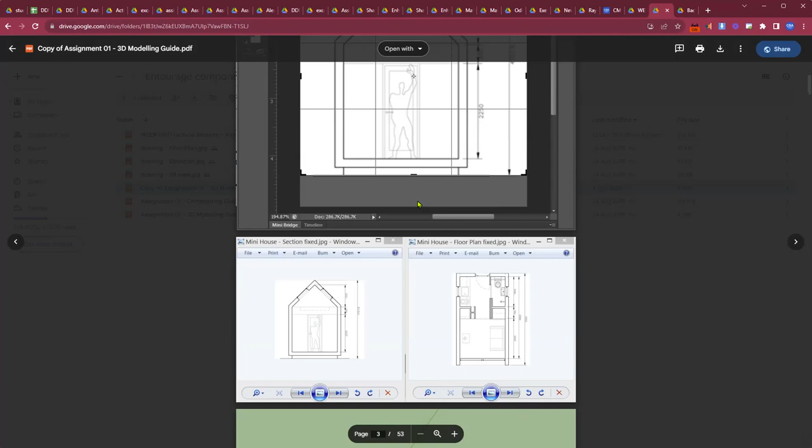And here we go, 3D modeling guide, right? So the video that we did only covered just the part to get you started. So on the handout where it gives you a link and says this is where you find the plans to do the model, in that folder I have placed a PDF, which is here. This PDF is what I call the cheat sheet, so it gives you a step-by-step snapshot of ways how you could go about building it.

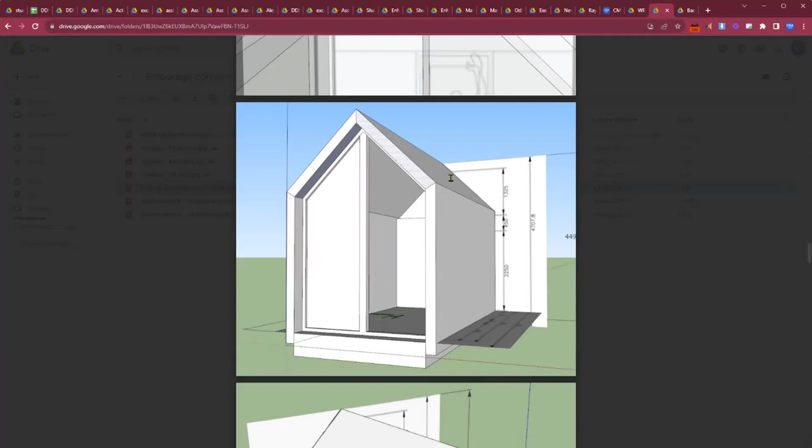All right. But nevertheless, for today's class, wherever you are with the model, we're just going to be using it as is. So let me see now, is there anybody here who finished the model? Anybody reach 70%, above 70%? No? No? 50%?

Hold on, who started? Who started the model? Who here started the model? Oh, wow. All right, so you should have told me about this sheet. I would have finished it then. Well, I did discuss it in the last class. All right, so here what now?

I will upload today's video. But you can take it as a danger warning that if you have not completed the model by today, then you're basically in the red for handing in the assignment on time, because this is the final week for handing in that assignment. So we said 2 weeks, and 1 week is gone already. Today is Saturday, so the official due date of this assignment is going to be by next class, right?

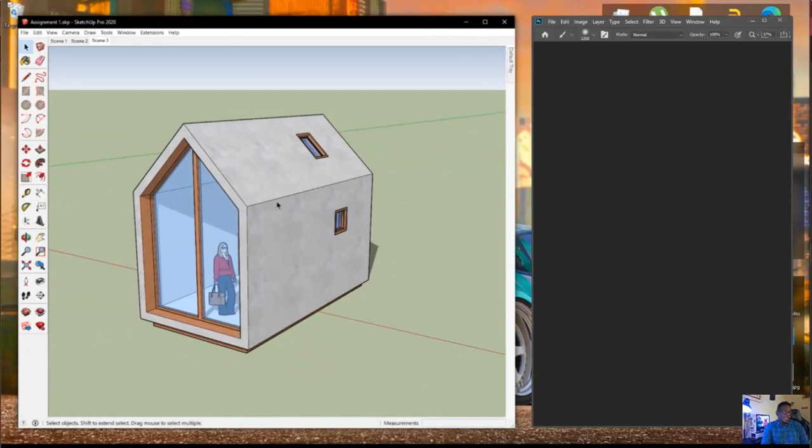Ideally, the first thing we would want to do is ensure that we have everything correct on the model, and let's take a look at that reference image again. So this is our model here, let's take a look at that reference image. You can see on the reference image that we have a nice background, we have this building in the water, but more importantly, it is perspectively accurate. We also have an entourage here, so in this case it's a boat. So the first thing we need to do is get our building at the correct angle.

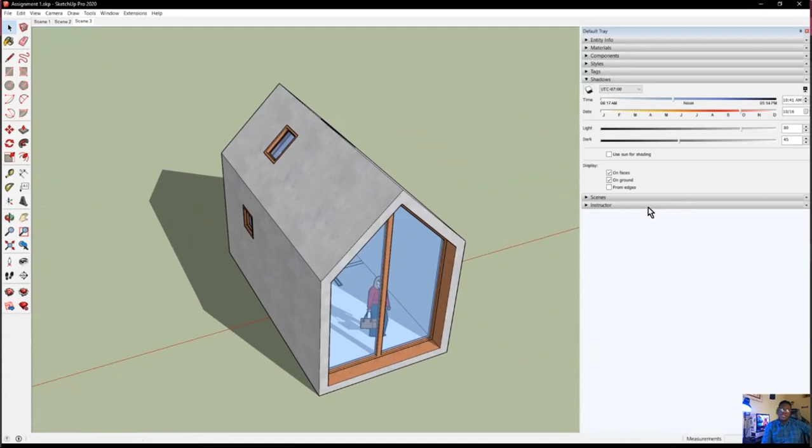Now, to do this, we're going to use a couple features from our tray, so I'm going to pin that since we'll be using it quite a bit. Now we do want to ensure that we have our shadows enabled, and we also want to get our background as well. If you look on the handout, you'll notice there's actually a link here to access entourage and backgrounds and things like that. Let's click on that.

Now, ideally, you must use a background from this folder, right? You cannot use your own background. So we're going to use this background and we're going to actually put this building in the water. Let's just look at the others that we have here. Okay.

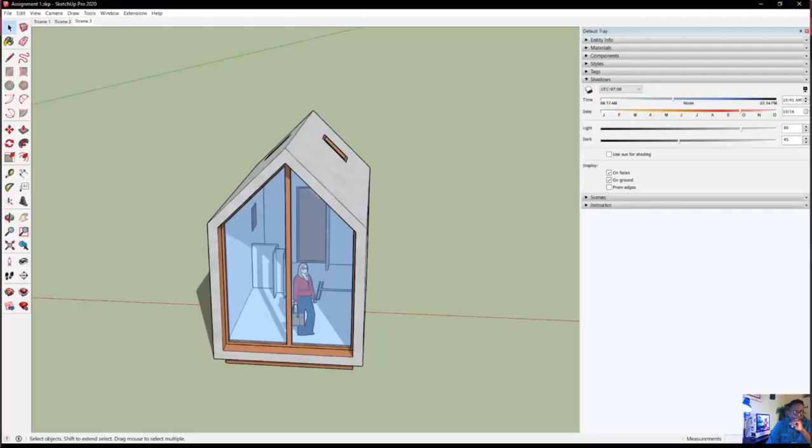Now the next thing that we want to do is, let's go back to SketchUp, and the first thing we need to do is to align our building to the background. Now how you do that is you need to head over to styles, and then you're going to go to edit, then head over to background and watermark, and you're going to click the plus to add a new watermark.

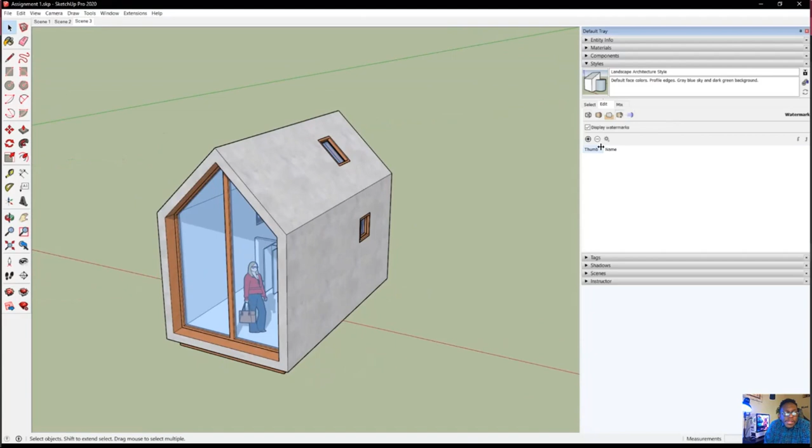Now you're going to look for where you downloaded the image, so here it is, and that watermark should just pop in our scene, and it should be semi-transparent, right? So notice it says you can do an overlay or a background. That's a background, so let's leave it on background and choose next.

And we're gonna just leave this as is. Choose finish, stretch to fit screen. You're going to lock aspect ratio, ensure that you do that, and you're going to choose finish.

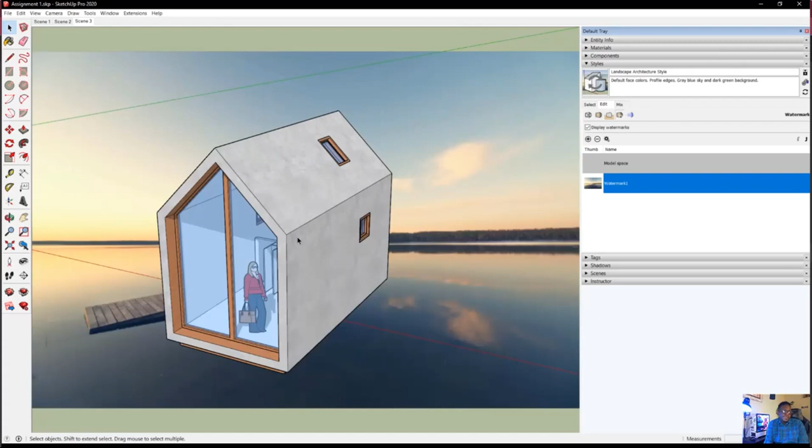So now what you're going to do is angle your building so that it lines up with the image, and you're going to do that by panning and zooming and just kind of getting the image just right. Now you also have to watch your perspective, because this image has, you know, the perspective is a little bit wider, I think.

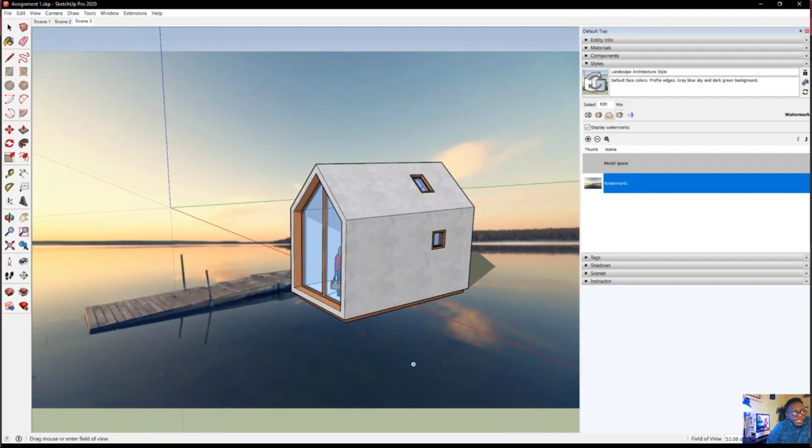So I would go to view and camera, and go to field of view, and I'm able to just kind of change my perspective a little bit to better match the image here. Kind of push it up a little bit, and you can kind of see how your lines are aligned to the image. You can use that to help determine how it would be.

Now you can additionally decide to put your building on the opposite side here. Let's kind of orient that a little bit. Now once you have your building roughly in place, you are gonna create a camera.

Let's give another image a swing here, because some of you might choose another image that is a bit more challenging to align. This one is not so bad. Yes, let's look at this one here. So I'm going to download this image again, right? And I'm going to go back to SketchUp.

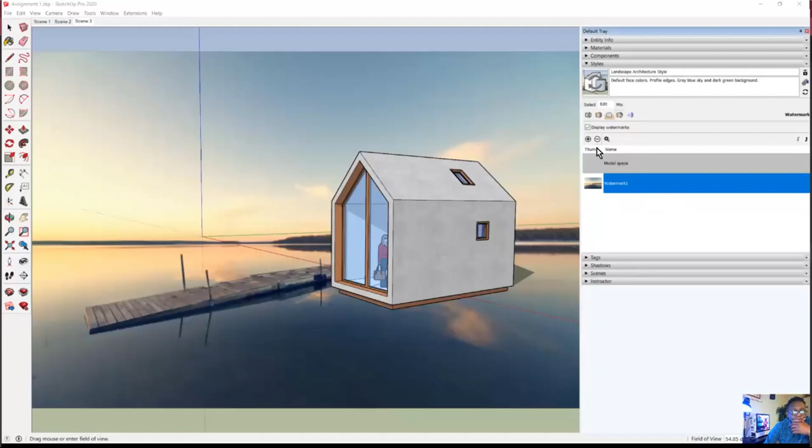And this time I'm going to choose a little minus there, so I'm going to delete that background. I'm going to go to add, and I'm going to add this new background, and I'm going to do the same things that I did just now, where I'm going to go next and next and next, and there we go. Oops, actually I put it on blend.

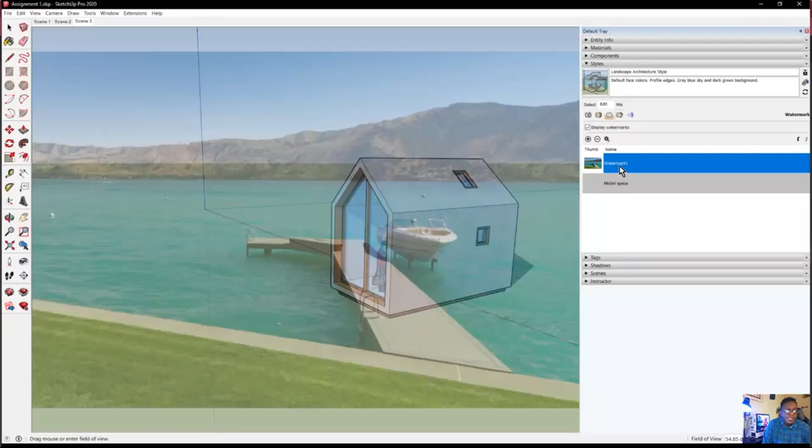Let's edit that. I think we can edit that. Okay, let's remove it again and add it back. There we go. Yeah, we want to change this to background, right, so that it's in our background.

There we go. So in this case, this one is a little more tricky to align. So remember, I was saying to watch your perspective lines. So if I do this like this, you would see that, okay, this is kind of okay.

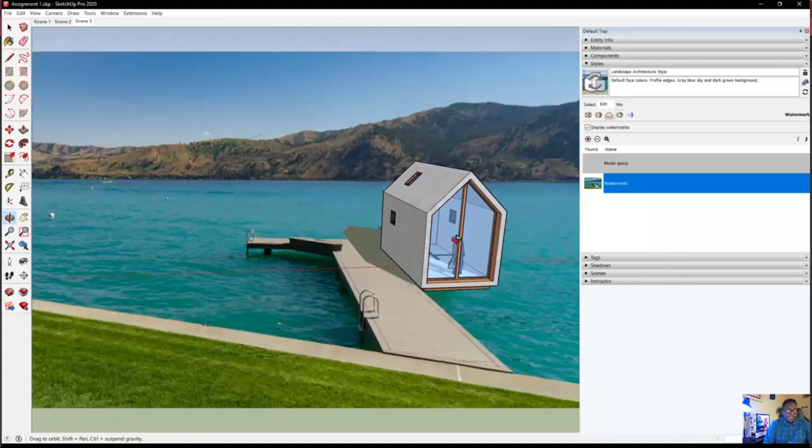It perhaps wants to come a little bit more that way. Then it perhaps wants to get a little bigger. So we're gonna zoom in a bit.

Now, when you're doing this, remember that this is a flat image. So let's assume that we wanted to put the boathouse on this side beside the boat, right? So we want to do something like this.

You know, let's say we want to do something like that. Well, of course, we're not able to put the house behind the boat because the boat is actually part of the image. So what we have to do is imagine what it would look like behind the boat, and then do that manipulation when we go in SketchUp.

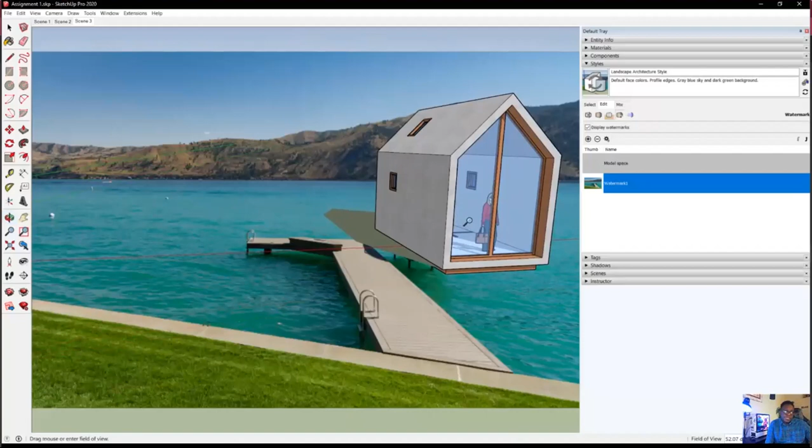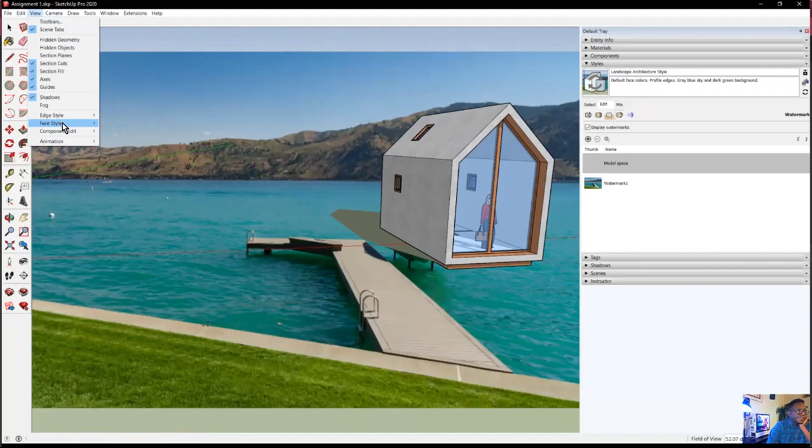So maybe it would need to be a little smaller, not too small. You can also switch your view to X-ray. Not X-ray necessarily, but more, let's go to wireframe. There we go. So wireframe will give you a better idea, because you can see where the lines are lining up.

So let's assume that we wanted to put it kind of something like that. Remember, you got to ignore the boat in this case. I think that would be about it. Now, before you do anything, you want to save this view because you might spend some time trying to align this thing and you don't want to accidentally move the mouse.

So we're going to save this view, we're going to go to view, go to toolbars, and we want to turn on a toolbar called advanced camera tools. Once you do that, that toolbar will look like this, or in some cases it will be horizontal. What you want to do is choose this first option, which will create a physical camera from.

Now, when you have the view like this, you're going to want to save your camera view in case you move the camera after spending so long to align it. And you're also going to want to save the style.

If you remember when we spoke about styles, we have actually edited a style here, and to save our style, this style will have a background. We're going to highlight this and we're going to call it new background. So now there is a visual style that's called new background.

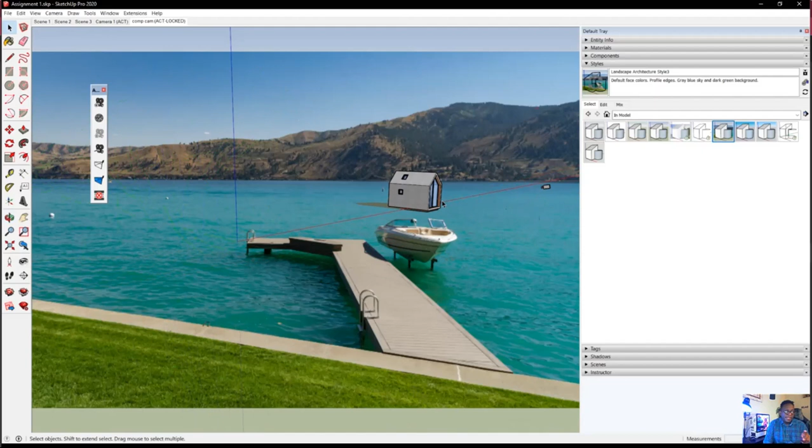So if I click my go to view, it's going to ask me which view do I want to go to, and it will go back to that view. So my view is saved. Now if I unlock, notice you see locked here. If I unlock the view and I move it, now I'm actually moving my camera. So you might want to do this if you realize that something isn't quite right, and then you lock it again.

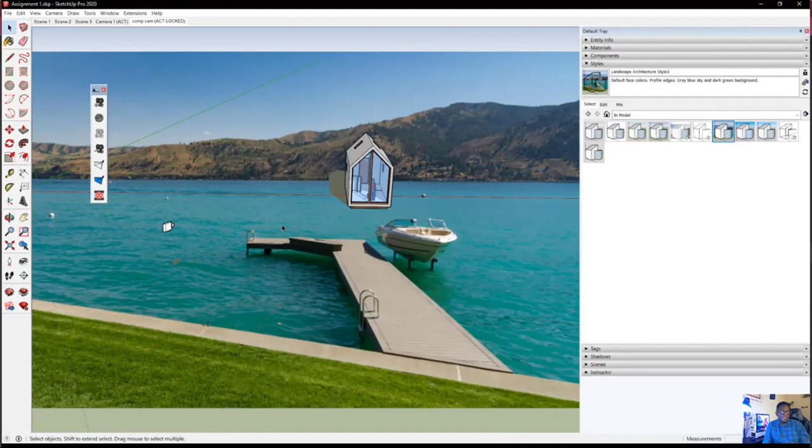All right, now once it's locked, I can move around and do other things that I want to do. So if, for example, you wanted to position a person or make some edits to your building, you can go ahead and do that and not have to worry that you're moving your view. Okay, let me go back to the view now.

There we go. Now the next thing that we want to do is, we don't want to export this building with this cartoon style. So what we're going to do is further edit this visual style. We're going to go to Edit, then to Edges, and we're going to turn off edges and profiles. That will give us a look a little closer to realistic.

Now remember that we're actually editing our style here. I've renamed my style to Landscape Architecture Style 3, but I'm modifying this style even further. So I would need to... well, the styles are automatically saved, so every time I go back to this style, it will load back everything.

Actually, it's not fully automatic, you do have to update the style. So for example, if I turn on my edges and I want to update this new style now, I need to click this button here, and now my style is updated. If I want to turn off, or make any kind of modification, I always need to update this style. Now you can know that your style is saved because if I go back to select styles and select a totally different style, I can go back to my Landscape Architecture Style 3 and everything should load back as how I had it.

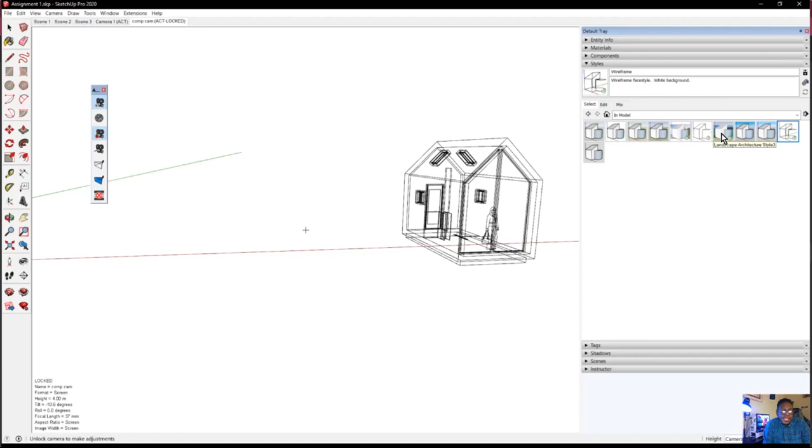So you save your camera, you save your styles, because you might want to come back to make some modifications and go back into Photoshop again.

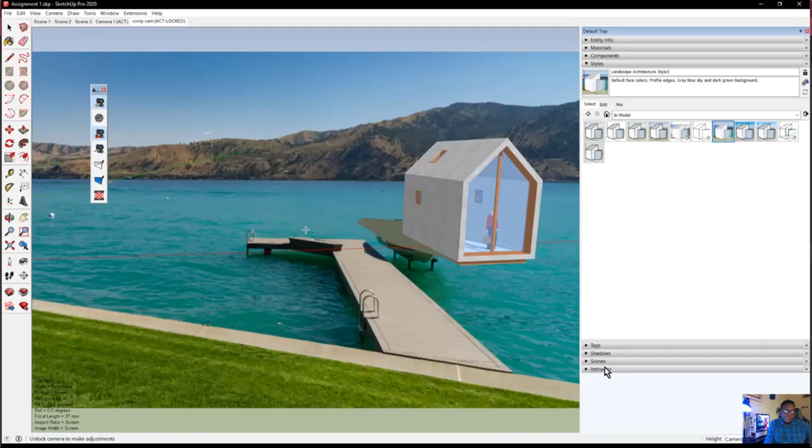Now, the next thing you want to do is to also adjust your shadows. Now to do that, you're going to go over to shadows. There we go, let's minimize styles. And when you go over to shadows, you might notice that if you want to get a different angle...

Notice that in my case the shadows are going this way, and I want to just carry it down a little more. Let's make it a little longer that way. I think that is good. Let's carry it back a little bit. There we go, so I am liking those shadows.

I can also set the darkness of the shadows and so forth. Now you might realize that you are not really going to get shadows to look really realistic in SketchUp, so we're going to have to make some modifications when we go over to the Photoshop side. But at minimum, you should be able to extract your shadows, no problem.

All right, so now that we have these things complete, we definitely would want to save our file. So I'm going to call it assignment 1 comp, short for composition.

And now what I'm going to want to do is to take this into Photoshop to do some more work. To do that, I'm going to want to save this, but without the image. That's a key thing. I don't want the background in here necessarily. I'd rather have a transparent image, and then I can always modify the background in Photoshop. So to get out this image, first I'm going to turn off shadows, because I don't want the shadows right off the bat. I'm going to come back for the shadows later.

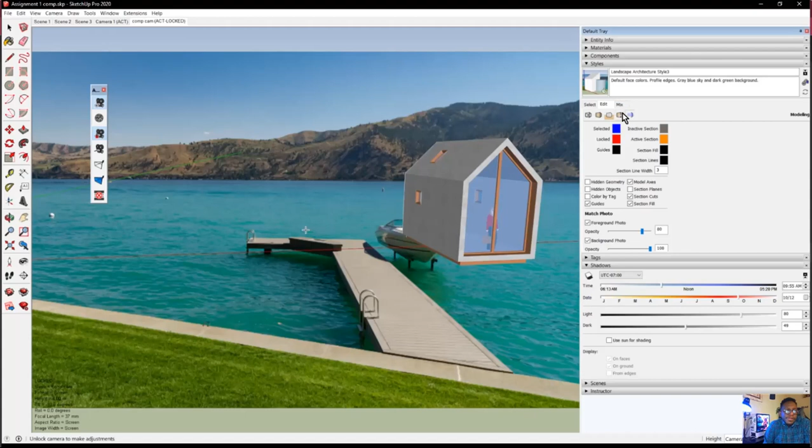But before I can get a transparent background, I actually need to turn off my background because I don't want my background from SketchUp. So let me cancel that and go back into Styles and Edit, and I'm going to go over to Background to Watermark. All right, there we go. And I'm actually going to delete this. Now I can always get back my style if I want, so it doesn't necessarily matter.

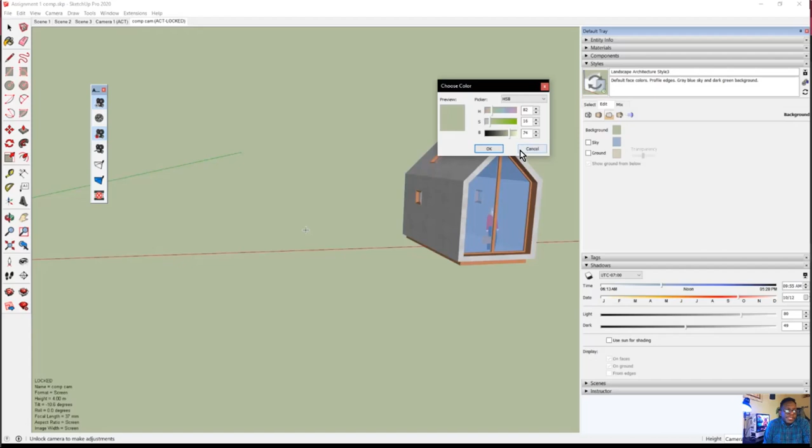I don't want a sky, and it doesn't matter what the color of the background is, you just want to ensure that your background is plain. I don't think it should matter, but let's just leave the background as is. And then we're going to go to Export 2D Graphic again, but this time we're going to ensure that we choose PNG, and then under options we're going to make sure we choose transparent background. All right, and then we're going to choose OK and export.

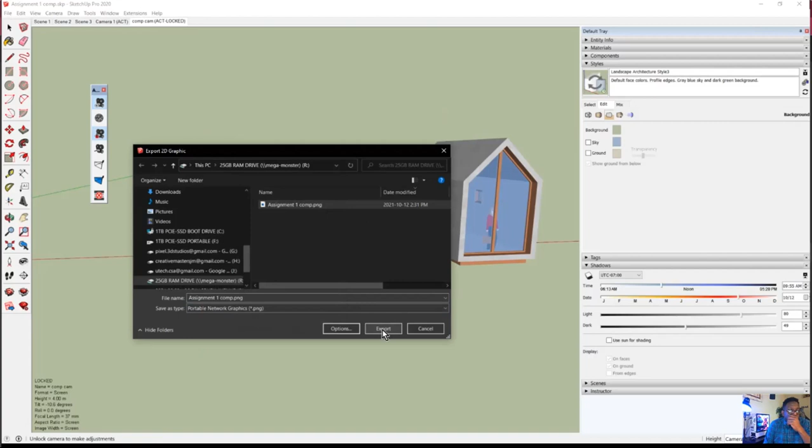And we're going to wait for SketchUp to generate this image. All right, now when you see the image, it's supposed to look like this. So there's nothing else in this scene but the building. Let's zoom in here - that's a nice image there. And we're gonna now work some magic in Photoshop.

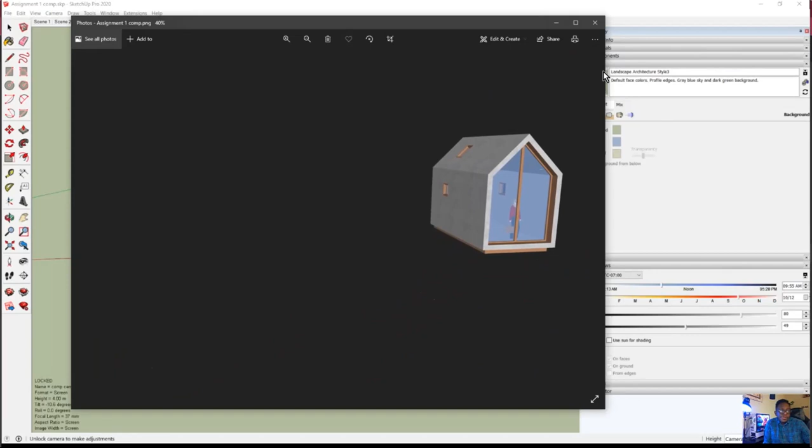Okay, now once you have Photoshop open, this time what we're going to do is open our background first in Photoshop. So we're going to go to File, Open, and we're going to find where we had that background. I'm going to go to Downloads, and that's the background that we got. Now it's important to open the background first, because the idea is that the background is going to be already aligned for us to the foreground.

Now once the background is in, notice it comes in on a layer called background, and I'm actually using my layout for my workspace layout for DDM that we created early on in the course, right? So this is why this is what my workspace looks like. Now the first thing we want to do, we want to not use this as a background layer - we want to have this as a regular layer. So we're going to right click that and go to layer from background, and that's going to turn it into a layer. We're going to call this BG for background.

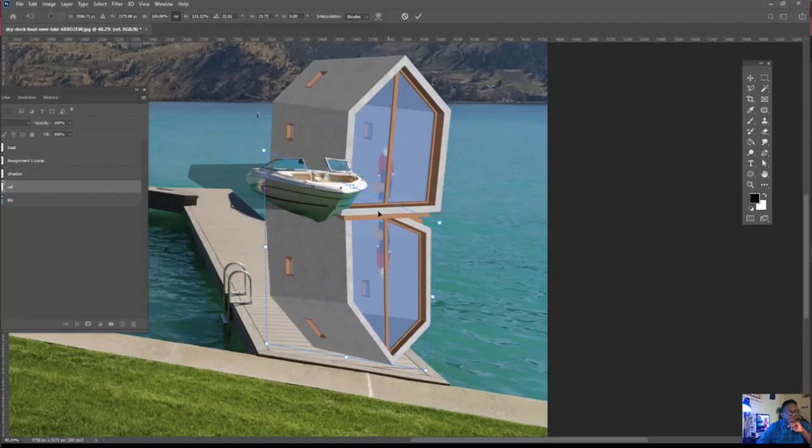So we're going to go to Edit, and then we are going to go to Distort. Let's see if Distort can do the trick. We actually want this to kind of be like that, and it doesn't have to be perfect, it just needs to look like it's right. There we go, it will take some getting used to. Okay, so that will be our reflection, so we're going to choose OK on that one.

Then of course we need to cut out the walkway section here, so we're going to do the same thing like we did with the boat. We're going to go to our background layer, and let's turn everything off. Now look closely, when you have a lot of layers, you can just click the layer above, click and hold and drag, and that will turn off whatever the mouse cursor hits.

Now what we want to do is cut out this walkway so we can use that. Make sure you're on the background layer. You're going to use the polygonal lasso tool, and this should be relatively easy because it's a straight line. So we're going to cut out the entire dock. We don't know if we're going to need it all, so I'm just going to cut out the top part for now. Doesn't matter that I've cut this in half, because we're not going to need it just yet.

Now once we do that, we're going to copy, and then paste in place. We're going to call this new layer that we've just cut out dock. Let's turn our layers back on, and we're going to put the dock layer in front of the reflection layer. Right, there we go.

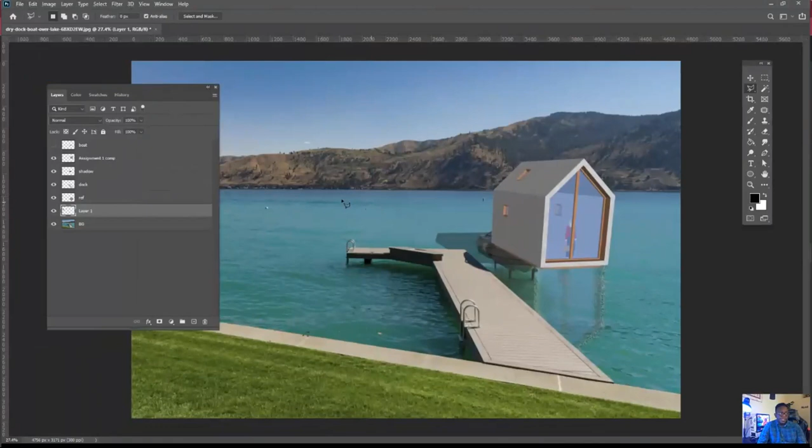I'll use my move tool and move that into place here. This needs to be on the top layer, so I'll put it all the way up top, and I'm going to try and just snap this in here. There we go. Now that's looking like a reflection.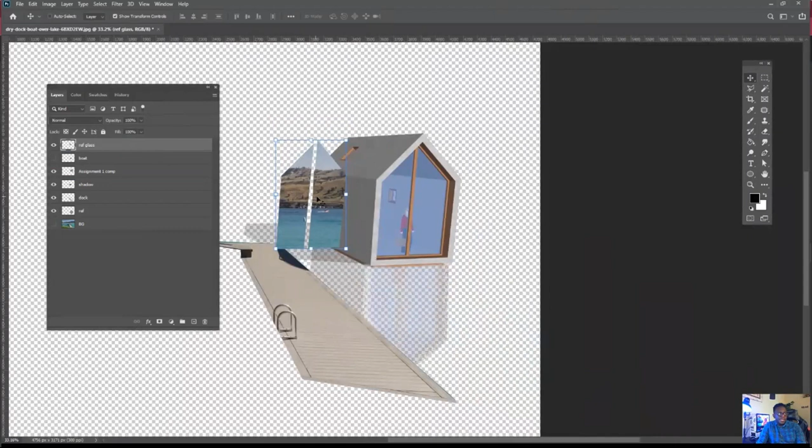Though it's not realistic, it can pass. Now the next thing we want to do is distort this a little bit. So we're going to bring the opacity all the way down — down so you just barely see it there. Let's bring it down even further. So now it's kind of mixed in.

Another thing we can try is changing the blending mode. Let's try Screen, and then take the opacity down. I think we get pretty much the same effect — almost the same effect. So there go our reflections.

Now, when most of this stuff is done, since you're in Photoshop, it's a good idea to do some color correction to help the picture blend more nicely. So we're going to create what's called an adjustment layer. To do that — that's a whole new panel — we go to Window, then Adjustments, and that opens up our adjustment layer.

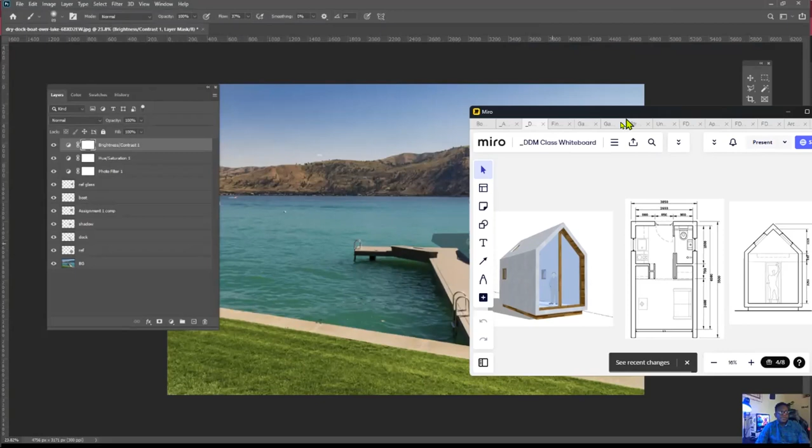Cool. All right. Now, what I'm hoping you guys can recognize from this is... all right, here we go. Now, the method that we use to put this together is this kind of layering method, right? Some of you might have recognized this from when I showed it previously. Now, the different numbers represent the different layers that we had put together in Photoshop.

Below the color correction, we had our entourage, so things like the boat, the people, trees, things like that—you have below your color correction. And then below that, you have what's called the image foreground. What is the image foreground? Those are elements that fall in front of your 3D object.

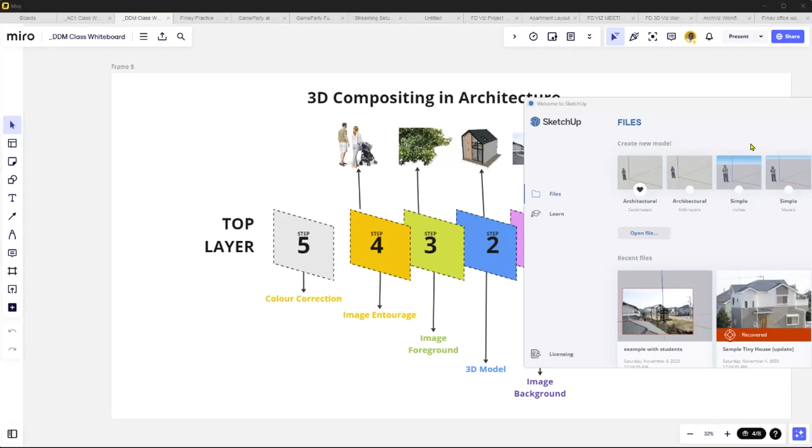All right, let's go with a blank architectural millimeters template. Let's see if I can locate my drawing.

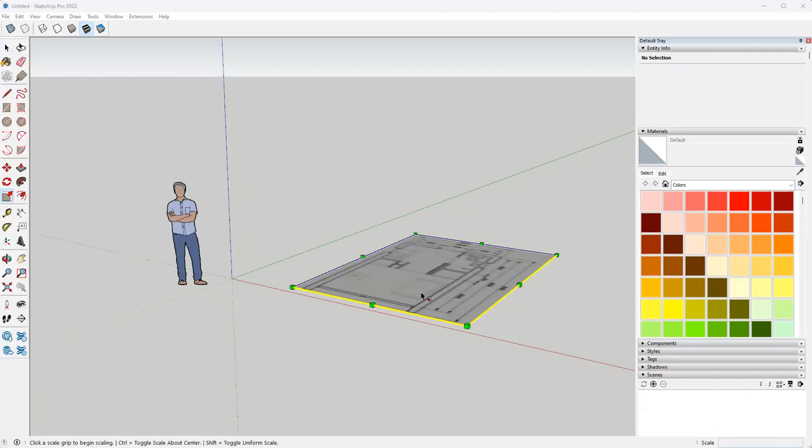Right, so that is the base, and this is the front elevation that you have right there.

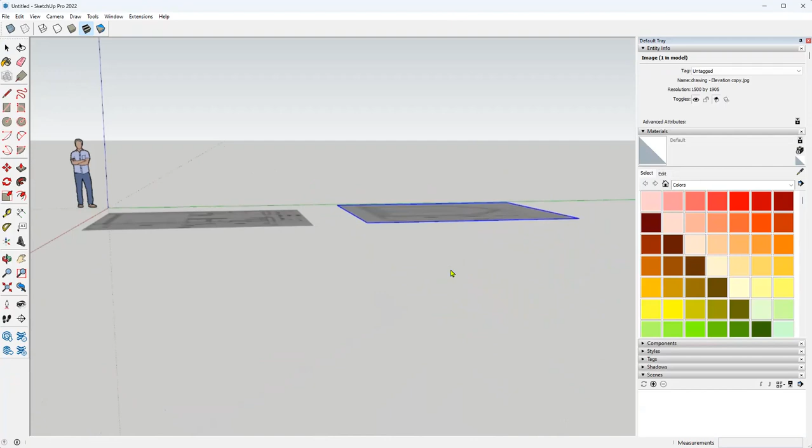One thing you have to recognize when you're rotating in SketchUp is that it depends on what your view is like. For example, in this case, I want to rotate this guy here like that. That's what you meant, right?

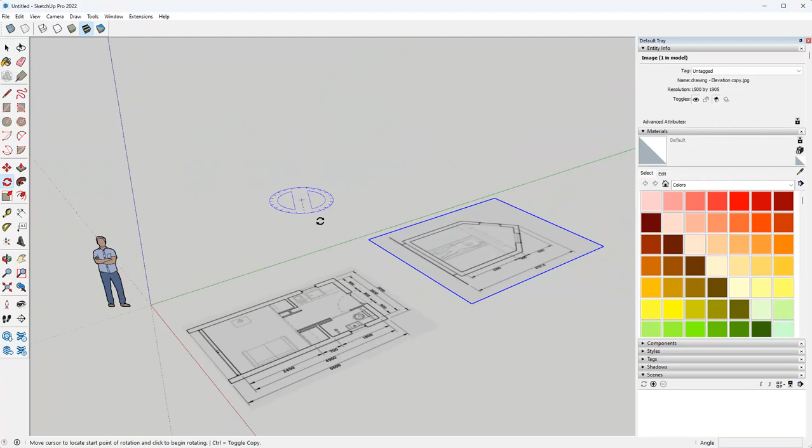Yes, sir. Right, so when you're rotating, it can be a little bit tricky. You would need to go to the protractor tool. The shortcut is Q, or you can just click the tool there, whichever one.

Now here's the thing. If I am doing a more top view like this, then I'm only going to get the option for the rotate tool, which is different from the protractor tool. This is the rotate tool here, and you realize you're going to be rotating in the Z axis.

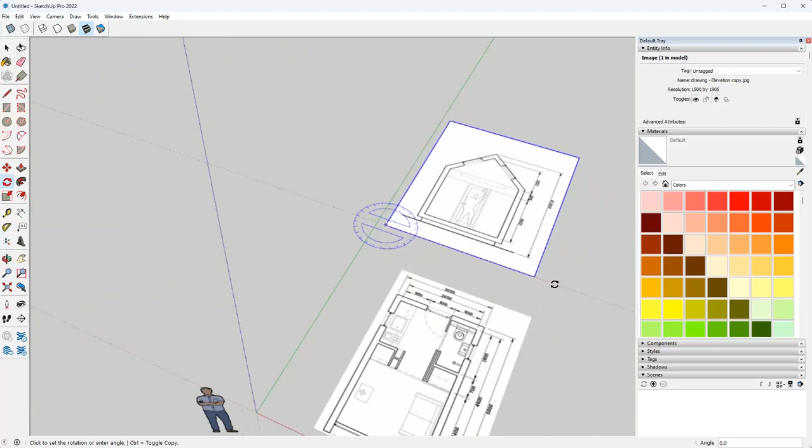But if you want to rotate along the X axis in this case, you have to orbit your view so that your UCS changes to the red axis. Here's the thing: this UCS works based on your view.

So if I hover in this general direction, it's only going to allow me to rotate in the Z axis. But the more I go into the distance, there it goes—now it has switched to the X axis. Of course, if I come back down, it's going to go Z again.

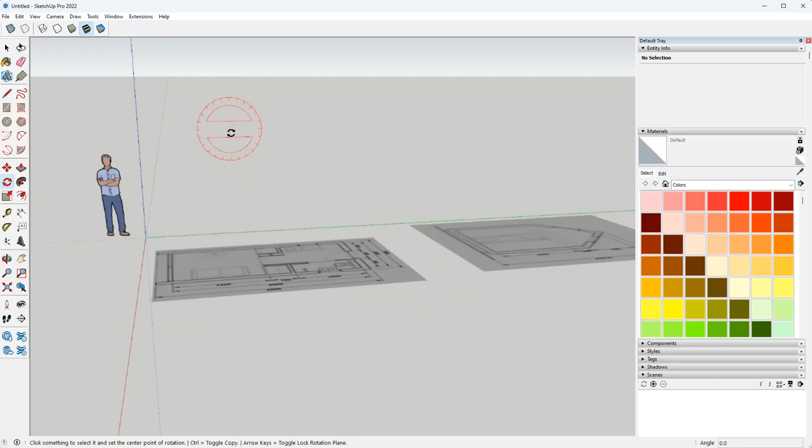So that's why I'm saying it depends on your view. If I had a view like this, it would be hard for me to get the Z axis, right? So what I would do is orbit it where I am a little closer to the ground, like that.

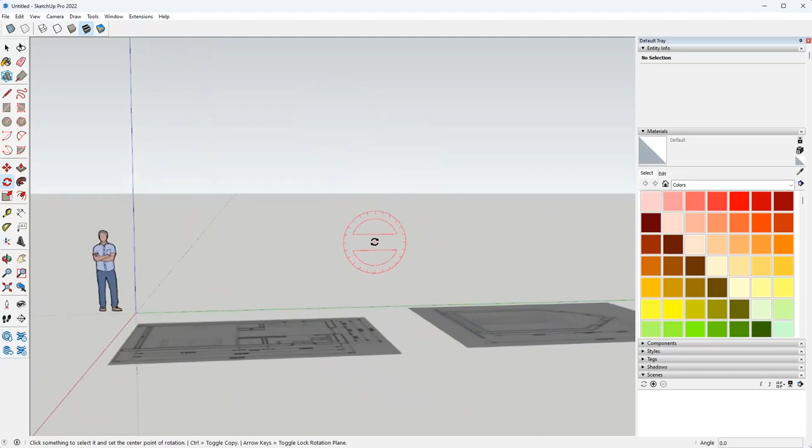And then when I get the red axis, I'm going to hold shift, and that would lock me into that axis. That means no matter where I put the mouse, I'm always locked into the red axis, which is your X axis.

So while I'm holding shift, I'm going to drop it right here and then click, and now I'm able to rotate that way.

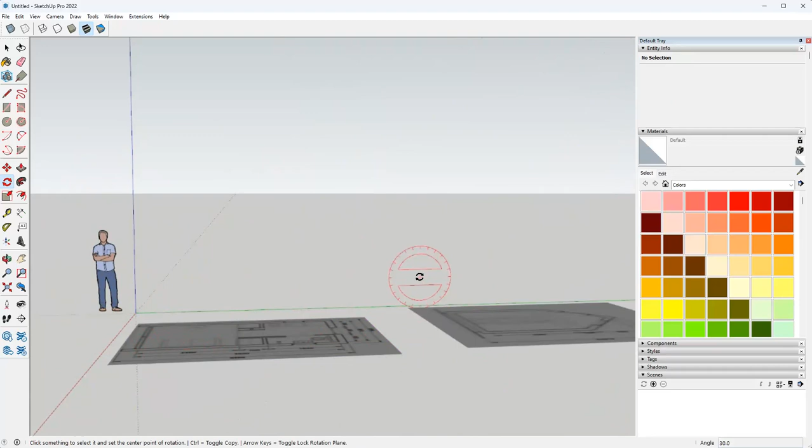All right, but the only trick you need to do is orbit your view so that you can change it to the red axis.

If you notice, when I go to the distance here, this is the green axis. So the green axis now would let me go that way, but that's not the way I want to go.

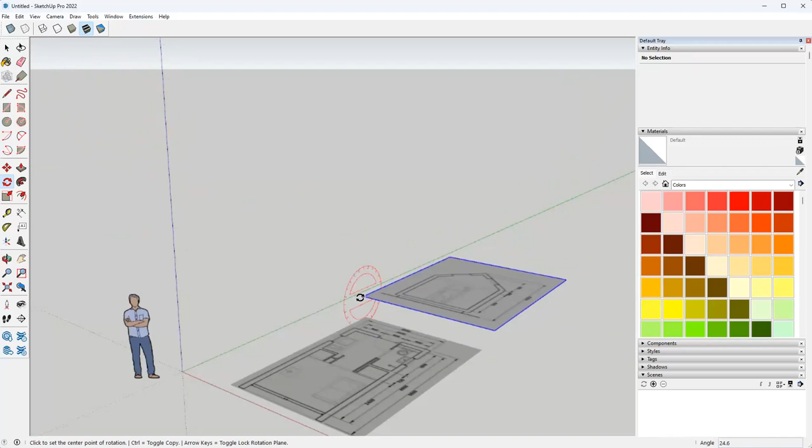So I would need to hover till I get the red axis, which I get when I move the mouse all the way up here, and then I hold shift, carry it back, click, and then I can rotate it. All right, so that's a little trick with rotating there.

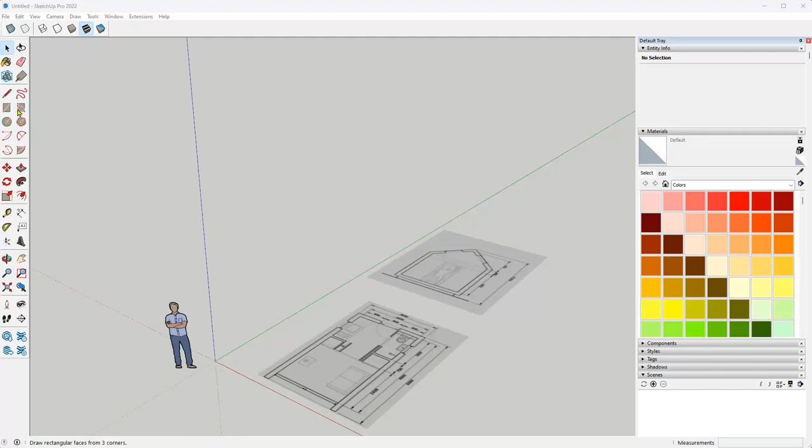Another tip that you can do is try to model in different components. So for example, if I model the wall, let's say I have the wall like here, I'm just going to rough it out.

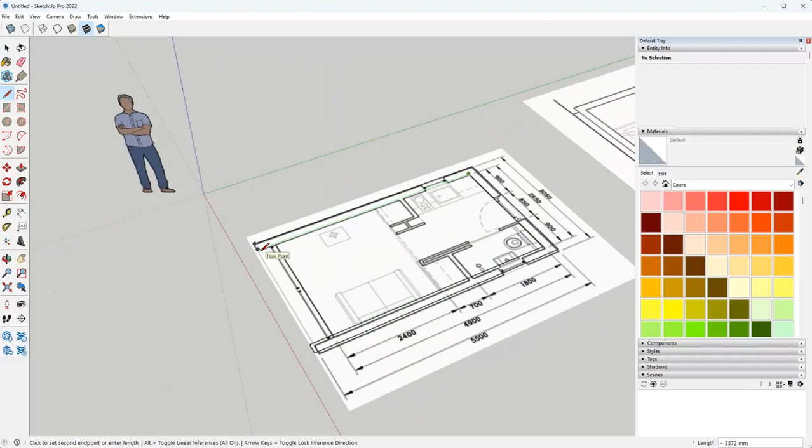All right, let's say that I have the wall like that. Before I draw the roof, what I would do is make this into a group or a component—in this case, a group—so that when I start to draw the roof now...

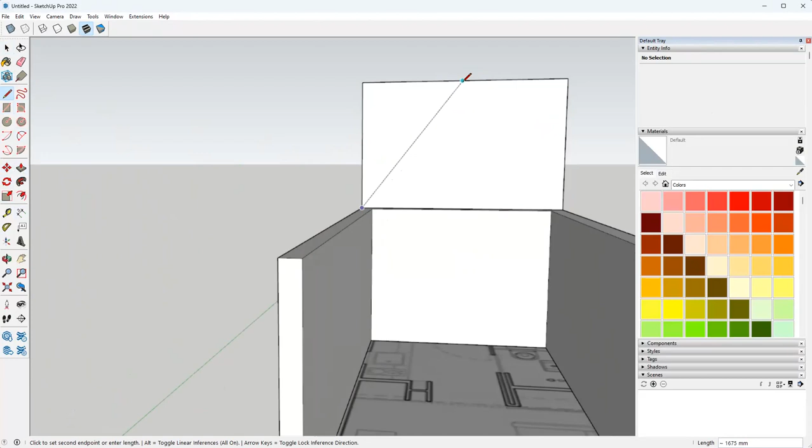For example, if I say I'm going to draw the roof like that—though maybe I shouldn't be giving you all these little tips and tricks you should learn on your own—anyway, let's say you decide to draw the roof, and I'm just going to do a rough kind of extrusion like that.

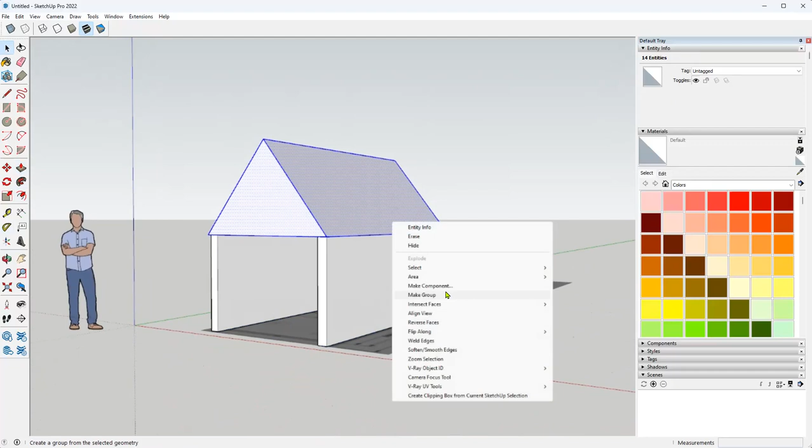Well, the roof is now a different element from the base. So then I would select the roof and make it a group. Now it's easier since they're not stuck together. I can still move it around, versus if it wasn't a group, everything would be stuck together, and if a line is off, the whole thing is off. So that's another tip you can use.

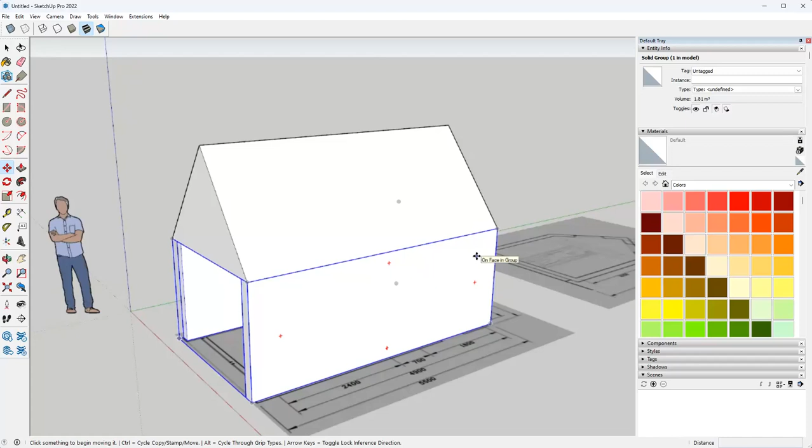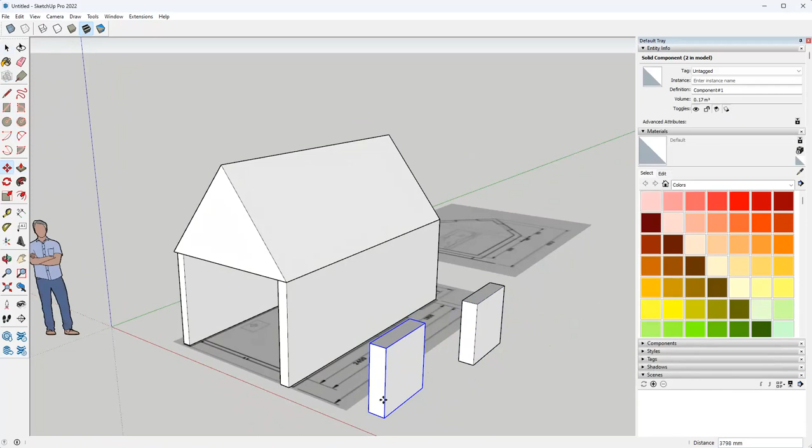Try to draw your windows and doors as a new group or component. Once that object duplicates, it's best to make it a component. The advantage of making an object a component is that if you change one, all of them will change. So if you have multiple windows, make one, turn it into a component, and duplicate it, and that way if you need to change one, the others will change too.

All right, that's as far as the tips I'm going to give you guys. Is there any more questions?

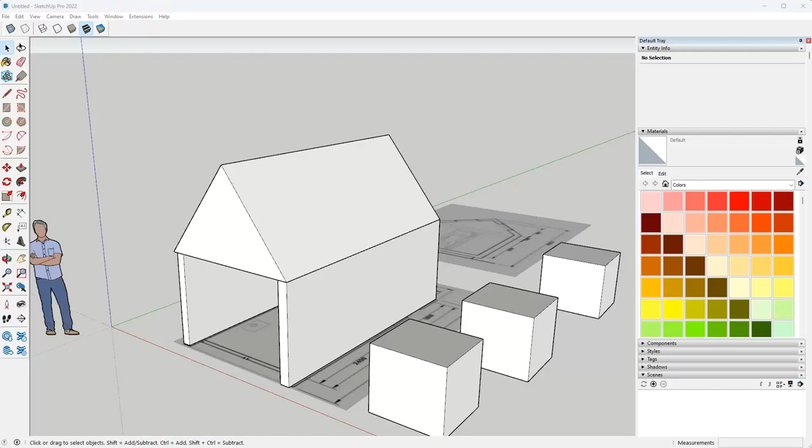After today, you're going to be on your own to finish this assignment. Please check the handout so you can see what's on the assignment sheet. Look clearly at what the handout says and don't make up instructions in your head. The handout asks for specific file types, so make sure you submit those file types as is.

When you're submitting the SketchUp model, make sure it's a SKP file. I've seen some persons accidentally submit a shortcut or the SketchUp backup file, so make sure you submit the SKP file. Also, notice that you have to submit a JPEG, you can just take a random picture like that.

All right, I think I've given you enough tips. Now go forth and get some hundreds on this assignment.

As I'm saying guys, I'm seeing a big concern with the submissions. I only see a very few amount that have submitted the studio-based project. This assignment is due this coming week, which you can easily finish today if you just spend the rest of class time and do it.